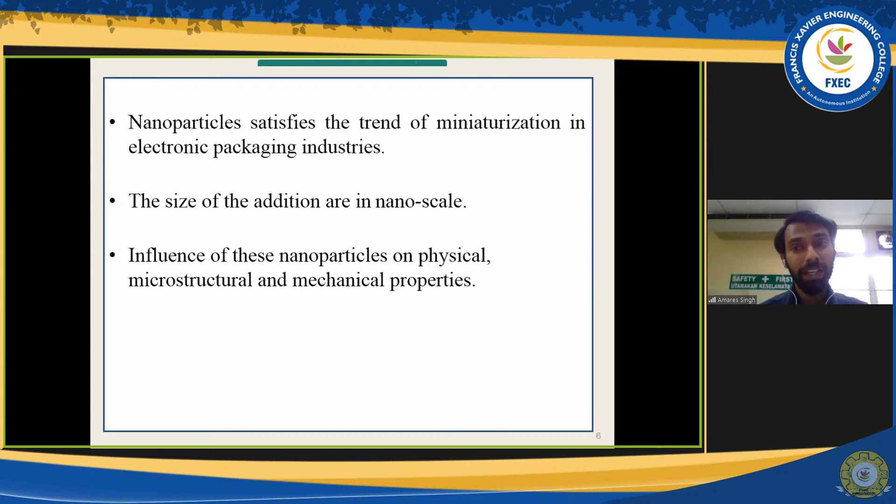So this background of study involves nanoparticle additions because nanoparticles are small in scale and they also satisfy the trend towards miniaturization. As we can see, our gadgets, mobile phones, televisions, laptops are not growing big in size, but actually reducing in size. But then how could it hold up in terms of long-term usage? We know our mobile phone has packaging chips inside that have to be held by a certain medium, which is the solder alloy. But looking at its size, it's getting smaller. So we need to do something to this particular solder alloy. It should be physically, microstructurally, and mechanically stable. So we will be looking into these particular studies.

So, problem statement. As you have seen, the title for today is lead free. Lead free means we are trying to avoid plumbum, because plumbum is categorized among the 10 most hazardous elements. So we need to avoid or reduce the usage of it. But the most used solder currently is basically the plumbum solder. Plumbum is mixed with tin and they produce the lead solder, which is tin-plumbum.

It is known to have very good mechanical properties. It also has a low melting temperature, only about 183 degrees Celsius, which means during the soldering process it would not damage other components, for example the LEDs or transistors. So being this proficient, replacing this solder is quite a challenge, because not many industries would want to accept a new solder that is probably expensive and at the same time not giving improvement.

At the same time, as I mentioned earlier, nowadays gadgets are getting smaller. So the solder I've looked into is the lead-free SnBi. I could say lead free because now tin is Sn here, and tin is mixed with bismuth, Bi, rather than plumbum. Of course, there are many other solders that have been studied, as I will be going through later in the literature review. In this current work that I'll talk about later, I'll be using lead-free SnBi solder. But it is said that it has mechanical strength which is not that good. That is why nanoparticles are being added.

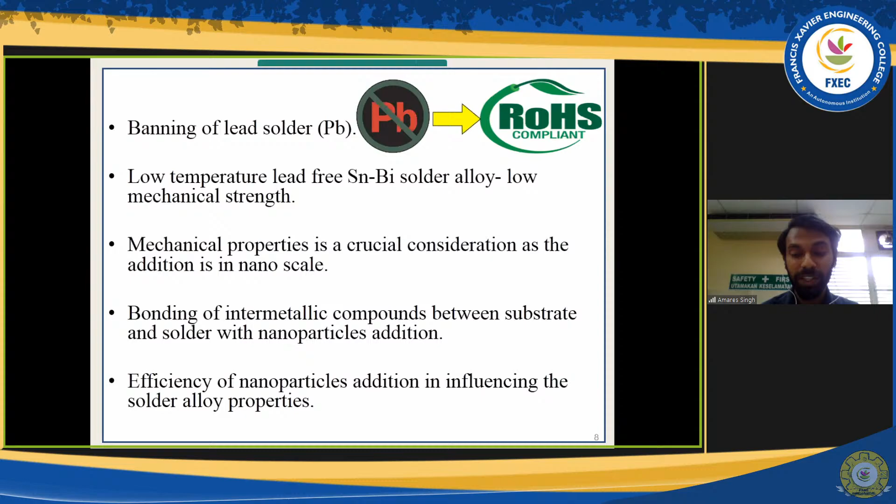In terms of mechanical properties, it's crucial that the nanoparticle addition satisfies high mechanical properties. We'll be looking into hardness and also shear strength. I'm aware that most of us know what hardness and shear strength of a material are. So when we are dealing with mechanical properties, we have to look into what is happening inside the solder when it's soldered on a substrate. Substrate means a platform, or in another case a printed circuit board, where the solder is melted and the components are attached. There would be a formation of a certain compound which we call intermetallic compounds between the solder and substrate. So as we can see here, the properties of the solder will influence the bonding between the solder and substrate.

So what we are trying to do here is to replace the traditional lead solder, SnPb, with a new lead-free solder. That is our main objective. As long as we can eliminate the plumbum from the Sn solder by addition of other materials, we are actually producing a lead-free solder alloy. But what should it do?

Okay, a lead-free solder alloy, when it's being soldered, should provide a metallurgical effect. That means when heat is applied to the solder, there would be a metallurgical joining, because we are using the solder. By this means, the chips are connected. Chips here means the electronic devices are connected through the soldering.

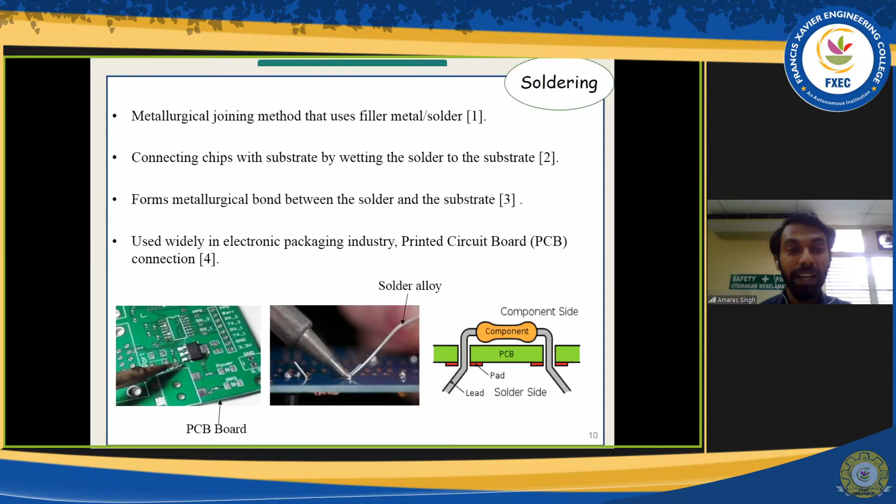So we know this is towards surface mount technology, because we are not altering the PCB board, but we are actually doing it on the PCB board. So it's actually a surface mounting technology. It should provide electrical, thermal and mechanical continuity. Thermal, of course, means it should be meltable, having melting properties, and mechanical continuity is in terms of shear strength and also hardness. As for the electrical, of course, it will be conductive because we are dealing with metal elements, right? So there's no problem in electrical as long as we are using a conductive element.

So I'll be looking into certain types of lead-free solder alloy. But before that, I've introduced slightly the lead solder, which is said to be the best candidate so far, but it's actually a lead solder. It has low melting properties, which is good because it does not damage other components. At the same time, it does not need any soldering adjustment. The temperature need not be adjusted because usually the soldering temperature is less than 250. Good mechanical properties. It's also low cost because it's very much available. Of course, it produces good interfacial bonding.

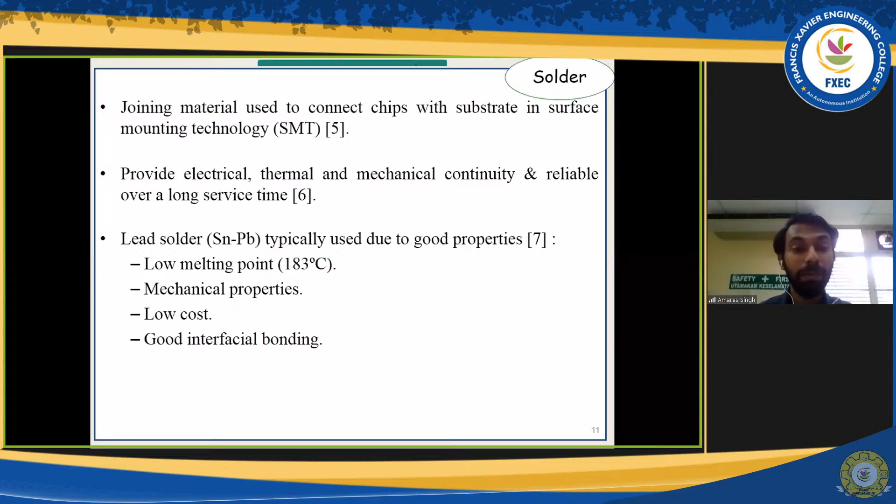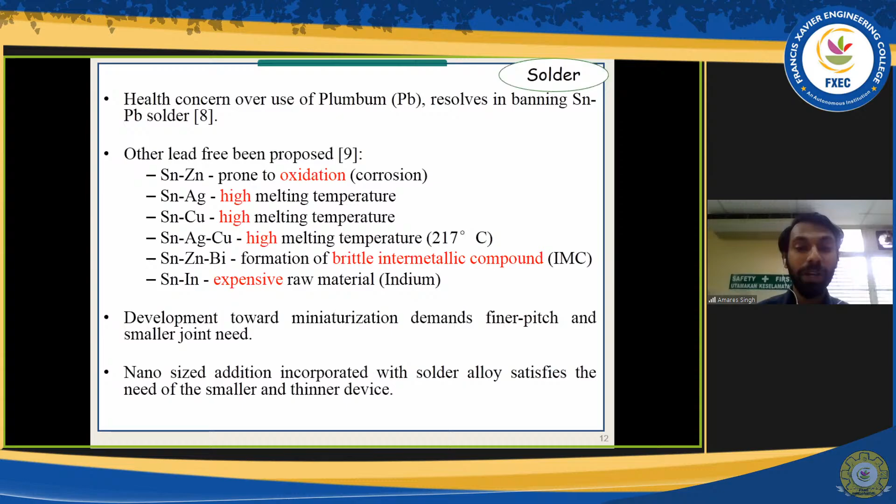At the same time, producing only lead-free solder has its limits. Let's say if we want to use a low melting temperature solder but need to increase the mechanical properties, we can't just add another element because we're actually reducing the size. So we are looking towards miniaturization, or addition of nanoparticles inside the solder alloy. There are a few methods that have been studied for nanoparticle addition. The first one is chemical reduction. That means they will be using a certain chemical component to reduce or break down the bulk solder to nanoparticles. But this is hazardous and it requires chemists to do this.

All right, we are actually engineers, so we try to use another method, which is the consumable direct current arc method. But this is a very advanced method that needs certain equipment which is quite expensive. Then we come to the conventional mechanical mixing method. I'll be explaining this method later. It's basically intentionally putting in or dispersing the nanoparticles into the solder alloy. Being called nanoparticles, the scale must be in nanometers, because even if the particles are at micro scale, the influence they impart to the solder alloy is different from when they are at nano scale. So it's very important to make sure the particles are at nano scale.

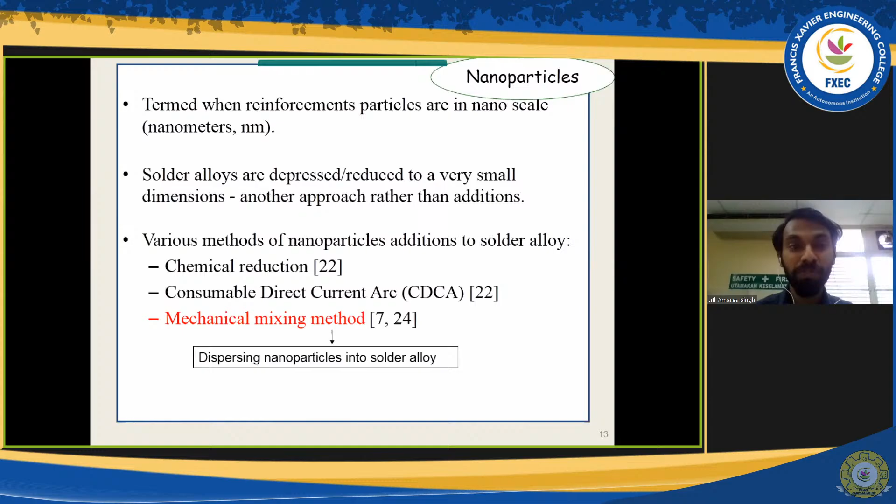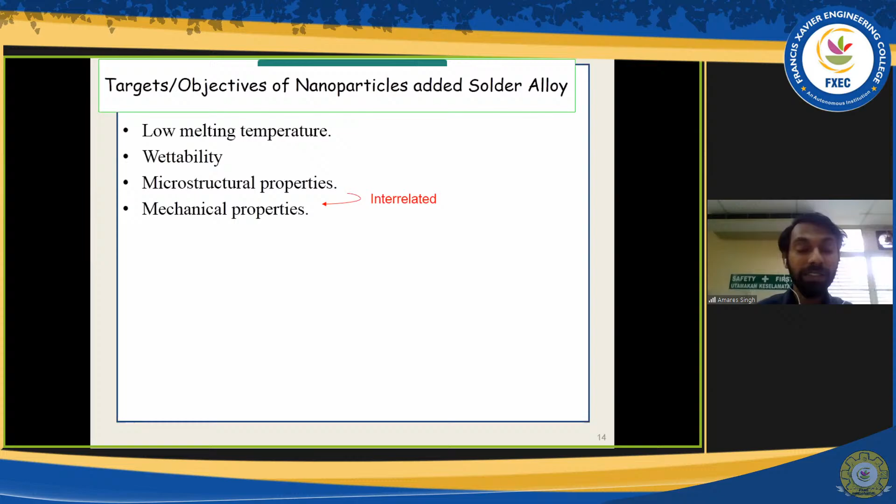Okay, hardness is the ability of the solder to resist deformation, because we know our mobile phone, for example, we might drop it, so it should have a good impact. All right, so hardness and shear strength are crucial mechanical properties. So these are a few studies that I've gathered.

If our soldering temperature is less than 250 degrees, it's okay. It's okay to use the nanoparticles because it's not elevating the melting temperature. At the same time, it would not cause any damage to the other components. So this is the important result that we see. But why is it happening?

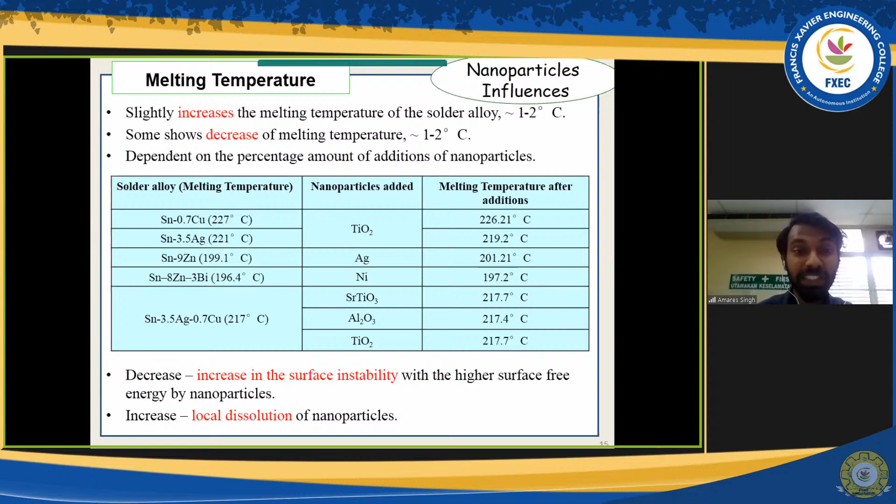So let's look at the decrease of the melting temperature first. Nanoparticles, when we add them, they actually increase the surface instability of the solder alloy. That means the solder alloy will lose its energy earlier than without the nanoparticle additions. Therefore, the decrease happens. Whereas the increase in the melting temperature is because of the local dissolution of the nanoparticles in the solder alloy. For example, when we are melting the solder and adding the nanoparticles, it will tend to have, of course, a higher melting temperature. So they actually produce local dissolutions, which slightly increases the melting temperature of the solder alloy. But not to worry, this gives us a good idea that addition of nanoparticles is not changing the melting temperature drastically. It's an important aspect to look into.

Another second part of properties is the wettability. We can separate the wettability into a few parameters that I've concluded here, the first being contact angle. In my work, I've also studied the spreading area and the spreading ratio. But before that, let's look at the contact angle. A lower contact angle, as you can see at the lower slide, means a good wetting, because a higher contact angle is a bad wetting, meaning that it can easily chip off from the printed circuit board. So let's see what happens when we add nanoparticles.

Here we could see that with small additions of nanoparticles, for example, if we add 5% of argentum, it tends to reduce the contact angle to 32 from 38. But then when we add 5% of zirconia, it seems to increase the contact angle further. So here the weight percentage actually plays a part, because when we add more nanoparticles, they have a certain character that they will attract to each other if there are a lot. So when they are trying to attract to each other, during the melting process, at the very edge of

the solder, at the edge of the solder is where the high energy is present. So these nanoparticles will be at the high energy area, and if the additions are a lot, they tend to agglomerate. What happens when they agglomerate, when they gather together, is that the solder will not be easily spread. There's like an impeding item or particles that will not allow the solder to spread properly. So here it's important to keep the weight percentage or the addition as low as we can, because even a small amount of nanoparticle additions can increase other properties such as mechanical. We don't need a lot. Whereas it's different when you're trying to add in a bulk element. If you add in a small amount of bulk element, it does not give any significant improvement.

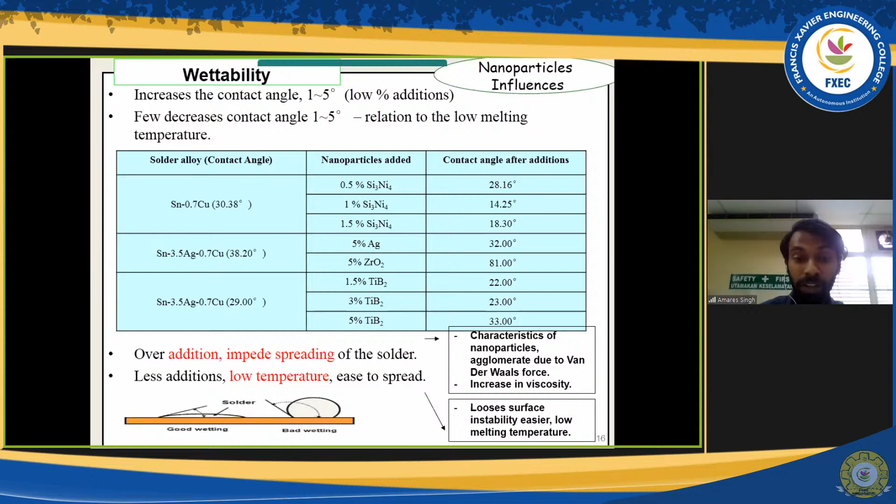So let's go to the next part. Microstructure is actually produced when there is a melting point and there is a diffusion between certain elements. So this is basically a metallurgical part. I would not want to go in depth because it involves more of material science. You have to look into the energy of a certain element. Let me just give a brief idea of what happens.

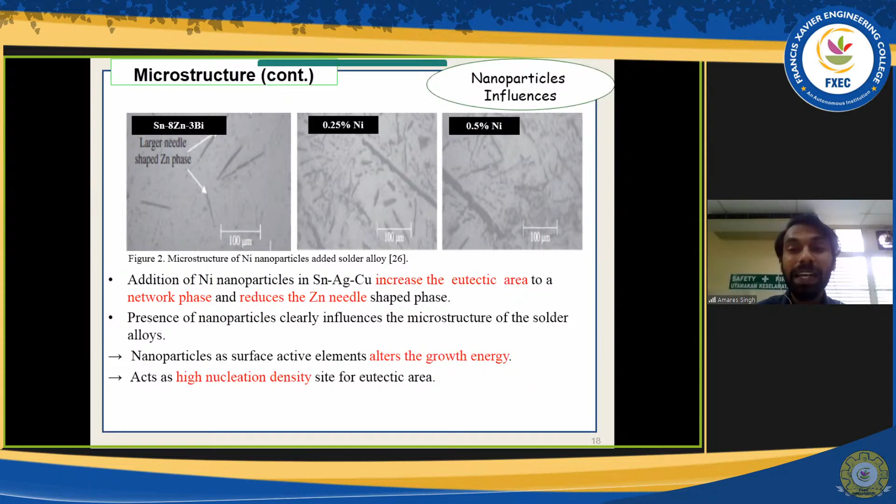So even in some cases, we can see that addition of nanoparticles actually tries to reduce the needle shaped zinc. So you can see the needle shaped zinc actually reduces upon addition of nickel nanoparticles, and they are a lot. So when they are a lot, they will try to be another source of strengthening effect.

Interfacial properties is actually the part between the solder and the substrate, between the solder and the printed circuit board. This is sort of like a layer that holds the component and also the printed circuit board. So we need a thin layer because thin layer will preserve a good bonding. But when you have a thick layer, the thick layer is prone to crack.

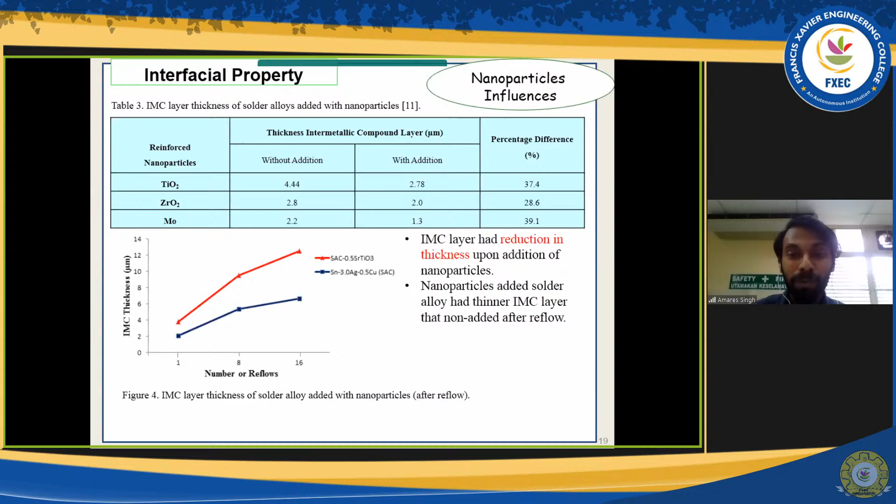So what happens when nanoparticles are added to these lead-free solder alloys? We could see, without and with addition, upon gathering certain literatures, the intermetallic compound layer thickness reduces quite drastically. Okay, I'll tell why. And therefore it preserves a thinner IMC layer. So let me just tell you what happens when the nanoparticles are actually at the interfacial layer.

So when these nanoparticles are there, they will block the diffusion process. That means, let's say there is a thing from the solder that tries to merge with the copper in the substrate. Yes, it can, but nanoparticles will actually reduce the diffusion process. Basically, it will not produce a high rate of diffusion and therefore preserves a thin IMC layer, intermetallic compound layer. But if there are no nanoparticles, there is free movement between the solder's element and the substrate. Therefore, at high temperature soldering or even at low temperature soldering, we will produce a higher or thicker intermetallic compound layer.

However, again, we need to preserve a small amount of nanoparticle additions. That means if you have a high weight percentage, like I said earlier, it will go to the edge of the solder. That means it is still considered as no effect in the center. That means the elements can still move freely without any blocking of the diffusion. So we have to maintain a small weight percentage of addition.

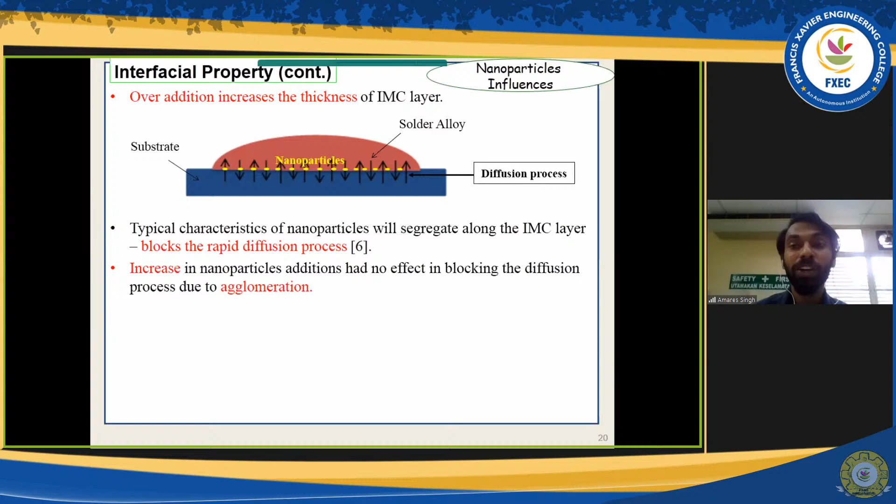So we can also see in terms of mechanical properties, additions of nanoparticles increase the hardness. But if you add a lot of weight percentage of nanoparticles, we will have a decrease in the hardness. This is because of the non-refinement process in terms of the microstructure.

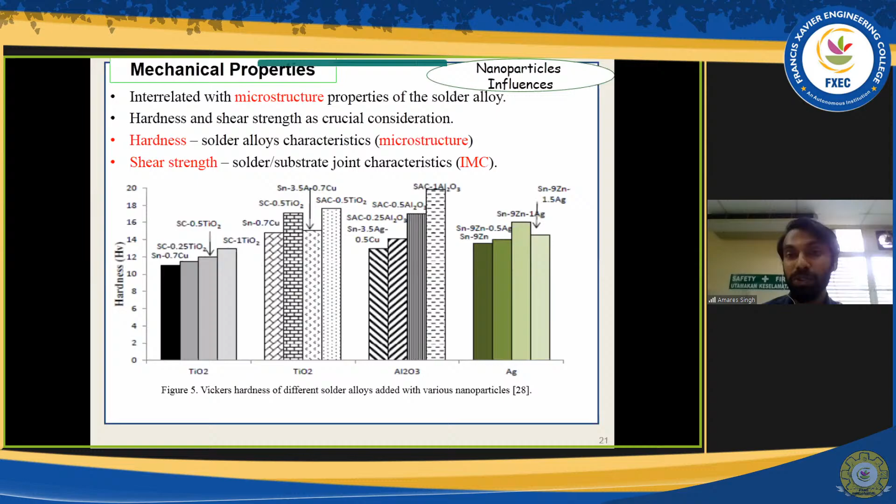Likewise, for the shear strength, we try to add more percentage of nanoparticles. If you have a small amount of weight percentage, it gives us better shear strength compared to a higher amount of weight percentage addition. This is again due to the agglomeration and also the non-refinement of the microstructure and of the thin IMC layer. So these are a few gathered mechanisms that are said to be the reason for the increase in the shear strength and also hardness.

We can see that one of them is grain size refinement, otherwise called Orowan strengthening. This is because the nanoparticles will reduce the grain size, and at the same time they act as another second phase strengthening mechanism.

Dispersion strengthening and the load bearing effect are also related to that particular concept. You can see I've highlighted what those three are related to. The fourth and fifth points, pinning of grain boundaries and obstruction of dislocation motion, are because the nanoparticles will be allocated along the grain boundary. So when stress is imposed, nanoparticles are hard materials. They cannot be penetrated. They have to be looped over, or they have to go around.

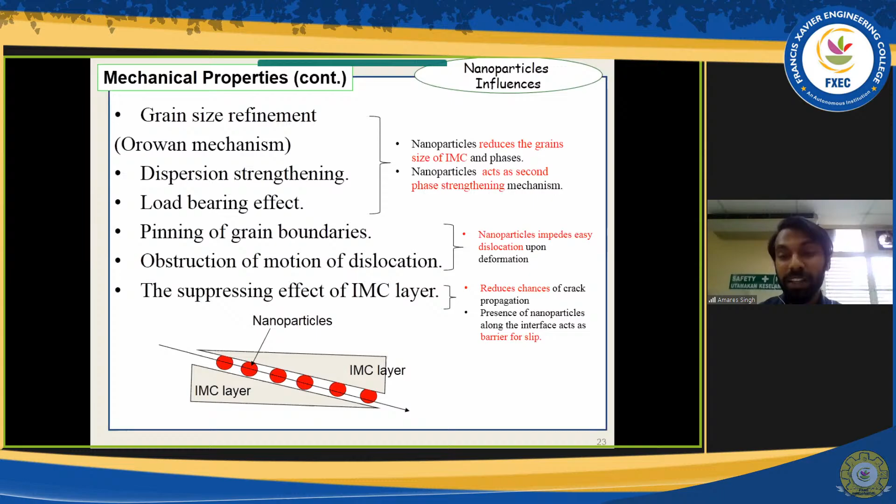So when more and more dislocations go around, there are piled up dislocations. So it's harder for the stress to penetrate. And the last one is the suppressing effect of the IMC layer, which is actually what I explained earlier. It will block the diffusion process between the elements in the solder and also the substrate. Therefore, we can get a thin IMC layer.

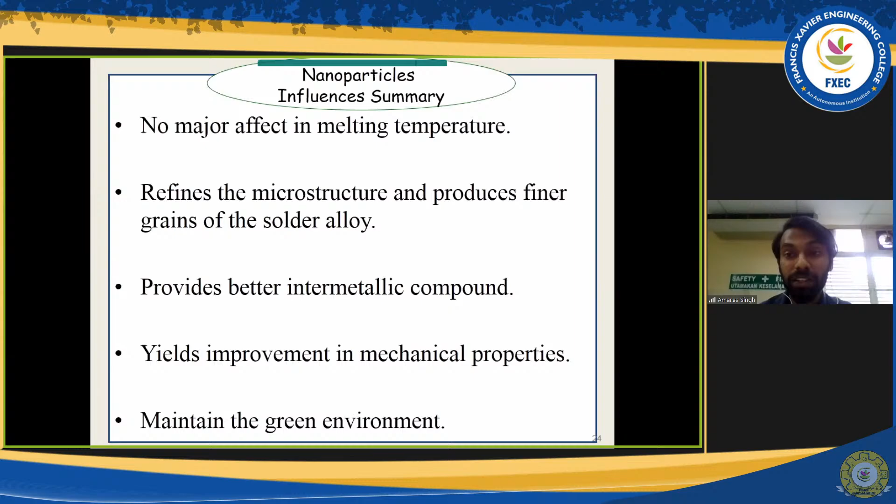So what does this whole literature review give us in terms of a hypothesis? No major effect on the melting temperature. The microstructure is said to be finer, producing a better intermetallic compound layer in terms of a thin IMC layer, and yielding improvement in mechanical properties. We saw the hardness and the shear strength increase. Of course, we are using a lead free solder, so it maintains its lead-free nature as long as we don't add lead nanoparticles, right? So it's a lead free solder alloy.

So what am I doing now? Of course, literature is just for us to study, and it gives us information. We need some experimental data, or we need some work to really show what the fact is, or what is happening in terms of the current trend. So basically, this is one part of my postgraduate or PhD results that I want to share here. Of course, this is confidential data, but I didn't put in the real confidential matters. I just want to explain what I've gathered. I've given graphs and so on, so no worries, it's just a sharing session.

Right, so this is basically what I've done. I've tried to add in molybdenum and zirconia. You can see Mo is molybdenum, ZrO2 is zirconia nanoparticles, and SnBi is, as I mentioned earlier, a low temperature solder alloy. Why do I want to choose a low temperature solder alloy? Of course, I don't want a higher temperature than SnPb, which is 183. There might be an argument from the industry saying that you are using a lead-free solder, but it's still a higher temperature than SnPb. So I've chosen SnBi.

But choosing SnBi gives me another problem, which is the mechanical properties. The mechanical properties of SnBi are not up to the standard or level of SnPb, simply because of the low melting temperature. With a low melting temperature, we know that the diffusion process is not as active or as vast as in a high melting point solder alloy. So the intermetallic layer is not that strong. That is why I try to add in molybdenum and zirconia.

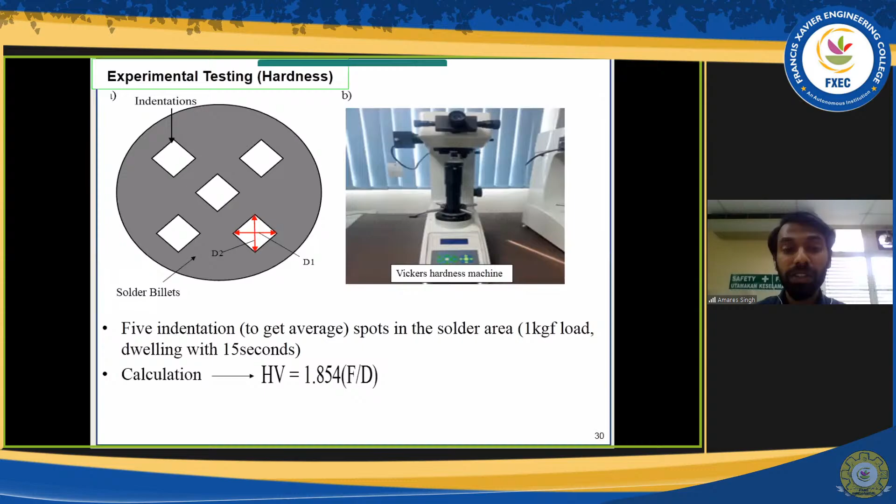So I can't be using the higher hardness machine. Vickers hardness is the recommended one. I've imposed a 1 kilogram force load for 15 seconds to get the hardness. As for the shear strength, I'm using the ASTM standard D1002. That is the standard for soft alloys, solder alloys, soft metals. Those are the standard testing methods.

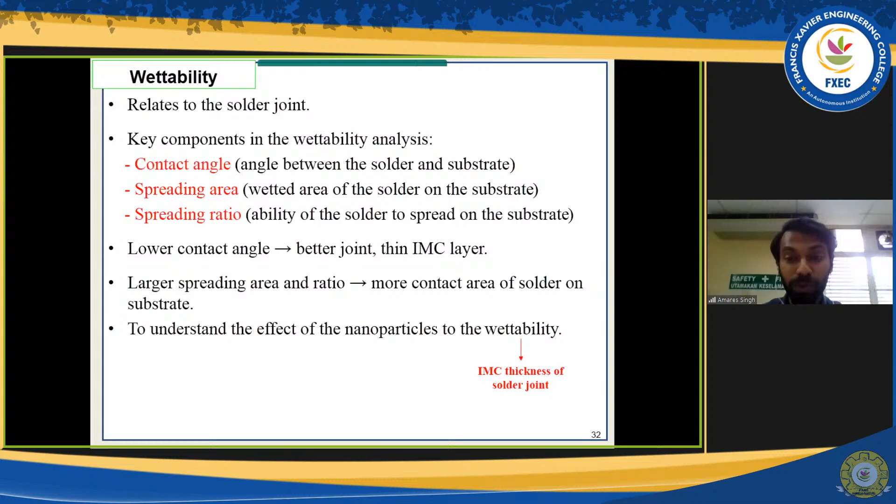So what happens when I test it in terms of wettability? A contact angle, as I mentioned earlier, is the angle between the solder and substrate. Spreading area is the wetted area, the area of the wetting or soldering that took place. So we are going towards a lower contact angle, larger spreading area and larger spreading ratio. Upon my additions of nanoparticles, I have gathered some data. We can see that upon additions of molybdenum, all 3% had lower contact angle than the non-added, with the lowest for the 3%. For zirconia, we also found that the lowest contact angle is for the 2%, whereas for all the others, it is still lower than the SnBi solder alloy.

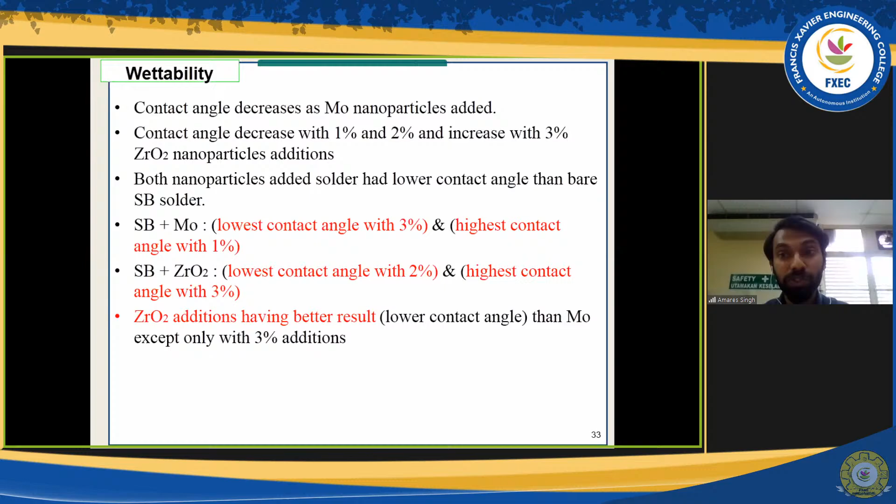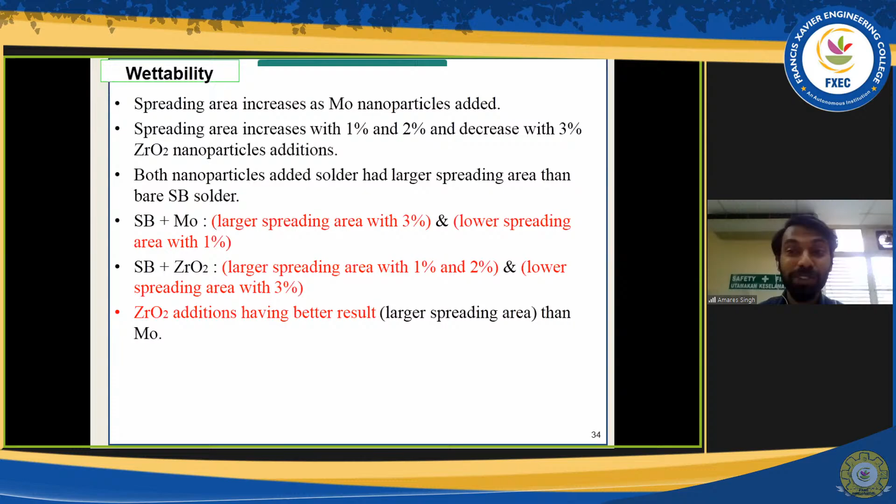So we can say that nanoparticles here have reduced the contact angle and also increased the spreading area. It's very important to note that the nanoparticles did not increase the contact angle. So we could say that our additions here are still acceptable, because if they produced a high contact angle, that would mean I still need to reduce the addition to less than 1%, maybe 0.5 or 0.3. But looking at it, 1, 2 and 3% are producing a lower contact angle. So we can proceed with the other testing as well. Again, the spreading area was larger in the nanoparticle-added solder for both molybdenum and zirconia. But in both cases, zirconia had a better result, probably because of the oxide element. I'll explain this later.

I have illustrated a model of my own. This is my own model showing what happens when we have the zirconia and molybdenum. In my particular study, the zirconia nanoparticles are much smaller compared to the molybdenum nanoparticles. Smaller nanoparticles have better segregation properties, so they are more evenly distributed, and a smaller contact angle is produced. Whereas the larger molybdenum particles tend to have van der Waals force that attracts the nanoparticles together. So the process of reducing the contact angle is not as efficient as with the zirconia. That is the reason for this.

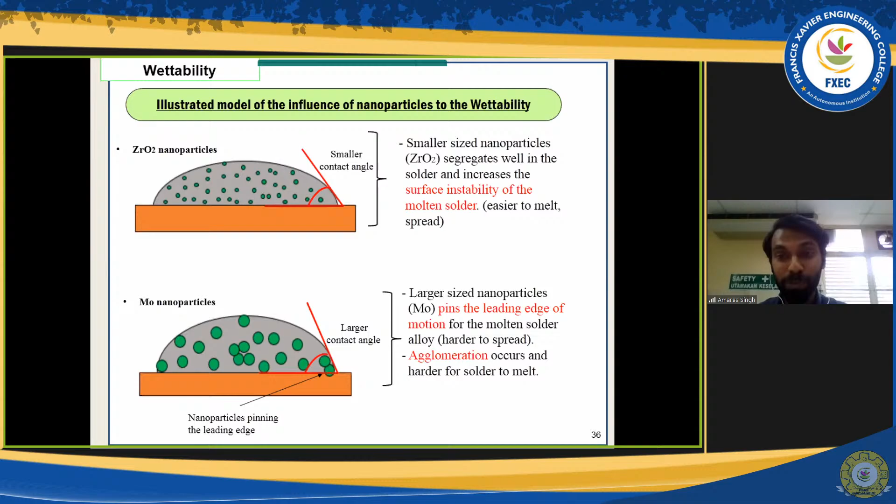I found out some agglomeration in the microstructural properties. Earlier I mentioned that the microstructural properties seem like a subjective area. How do we know if the grain is being reduced in size? Since our solder is tin and bismuth, I've taken the bismuth area, because from EDX analysis I can distinguish the difference between the tin and the bismuth area. So I've taken the bismuth area to be calculated.

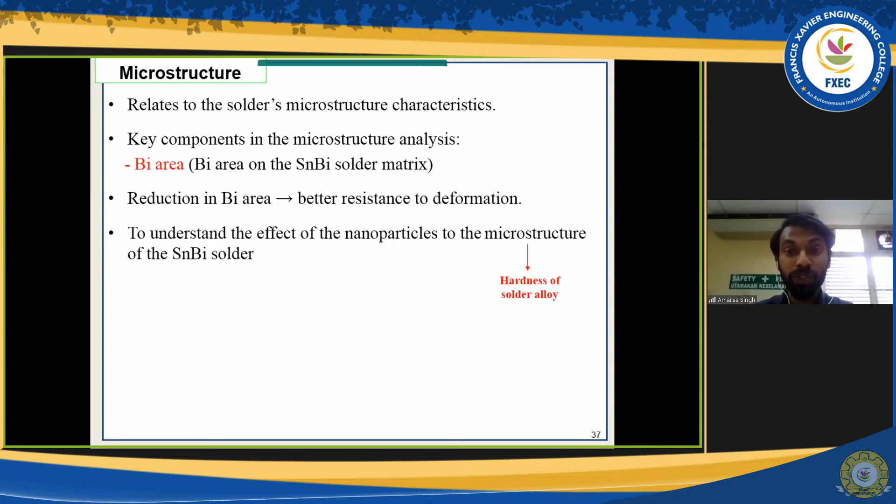If I can see a smaller area calculation for the bismuth, then I can relate it to the nanoparticle additions. So here I'll be measuring the area of the bismuth upon additions of nanoparticles. We have a software that can calculate the area for us. We have to, of course, separate the area of bismuth and tin, but after the separation is done by me, the software can give us the area of the bismuth. I have to do it a few times to get a proper average, and then we can say that this is a consistent result.

So we can see the first one is for the non-added. Then accordingly, I've listed the additions of nanoparticles in increasing percentage. Looking at the zirconia first, all 3% of additions gave us a measurement of the Bi area which is lower than the SnBi. Whereas for the molybdenum addition, only the 2% had a higher Bi area measurement compared to the SnBi. There is a reason behind this.

There's a reason behind this that is related to the shear strength or intermetallic compound. Because upon study of the microstructure, I have seen less molybdenum at the solder side. Most of the molybdenum for the 2% has attracted itself to the interfacial layer. When they are at the interfacial layer, they produce a thinner IMC layer, which was compatible in this study. From that, I could prove my hypothesis that the 2% molybdenum nanoparticles were not much found in the microstructure or solder side to reduce the Bi area, but were mostly found on the interfacial side, which reduces the IMC thickness.

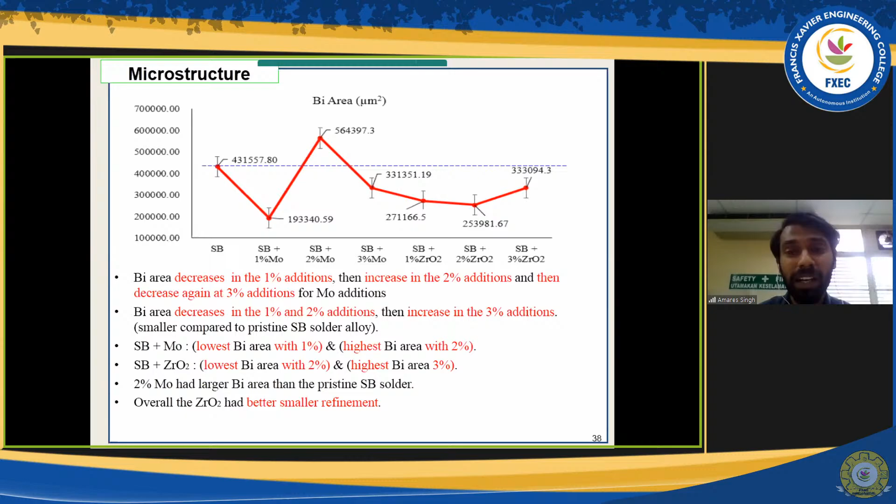However, although this gives a good impression on the IMC thickness layer, the hardness properties will not be as good as the shear strength. We need to be satisfied in terms of both shear strength and hardness. But we can see that the zirconia here had a lower Bi area. This is simply because of the small size of the zirconia nanoparticles. So this is again a model that I've developed.

We can see, in picture E, that this is not the SEM image itself. I've extracted and drawn this model from the SEM image, so I know what happened at the particular sites of the Bi and Sn. I've labeled here that the Sn is the dark area and the Bi is the white area. Upon addition of nanoparticles, the reduction, basically due to the zirconia and the 1% and 3% of molybdenum, is because these nanoparticles restrict the growth of the Bi. So they produce a smaller, refined Bi area. But for the 2% additions, there was agglomeration and not many molybdenum present, so there is no refinement process there.

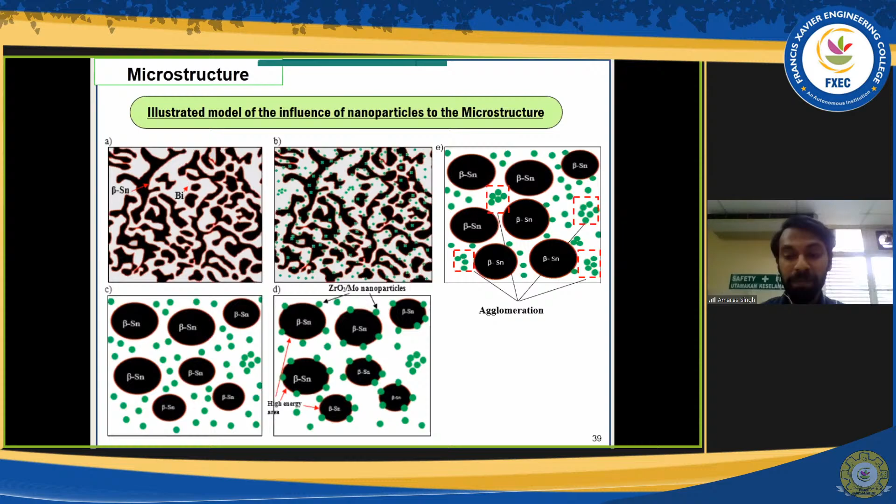This is what I have been explaining. When the nanoparticles are smaller in size, they are properly dispersed. But when they are larger in size, for example molybdenum, they should be given a lot of focus so that they are evenly distributed. Since we are manually distributing the nanoparticles, it's quite hard to have a proper distribution. So if you are using manual or mechanical stirring, you should use smaller nanoparticles. Unless we have an automated or injection sort of nanoparticle machine, then we can use larger particles. We can put the particles at a certain area to improve. Of course, it's cost.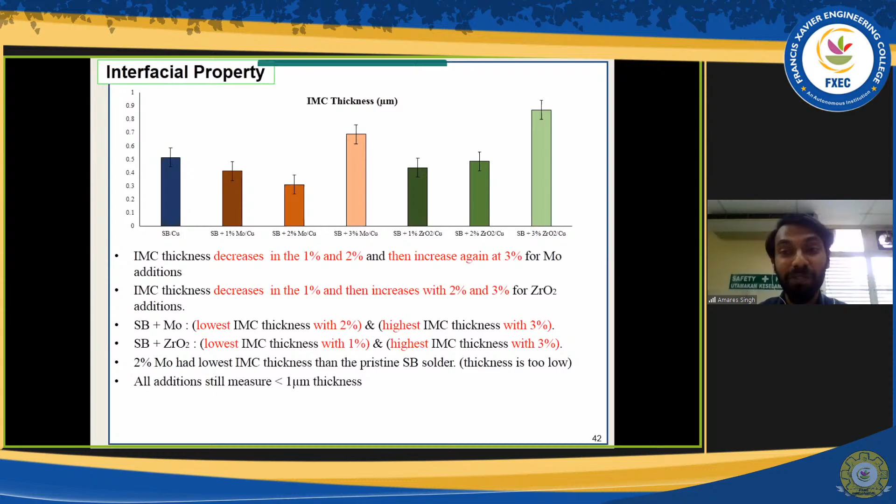So even though there is production of IMC layer, they are not as thick as what is being found in the 3% zirconia and 3% molybdenum. This is simply because 3% zirconia and 3% molybdenum have a high weight percentage. So the tendency for agglomeration to happen there is much more compared to the 1 and 2%. Even more so for the molybdenum, because molybdenum is a larger size particle. So looking at that, I saw the presence of agglomeration at the interfacial layer. Although there is a blocking of diffusion by the non-agglomerated particles, in some places that are agglomerated, the blocking of diffusion is lost.

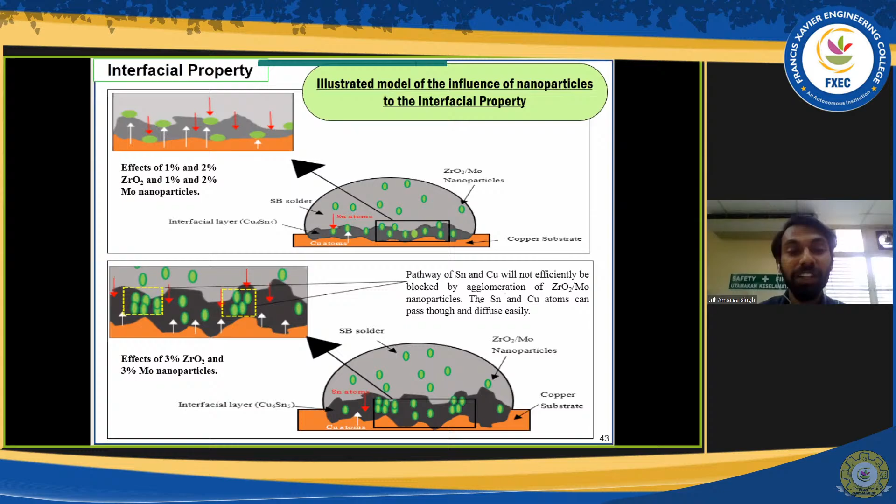So this is a brief summary. You can see that even though 3% zirconia and 3% molybdenum had a higher thickness, measured as a larger thickness, it is still less than 1 micrometer. So it maintained a thin IMC layer compared to the other studies.

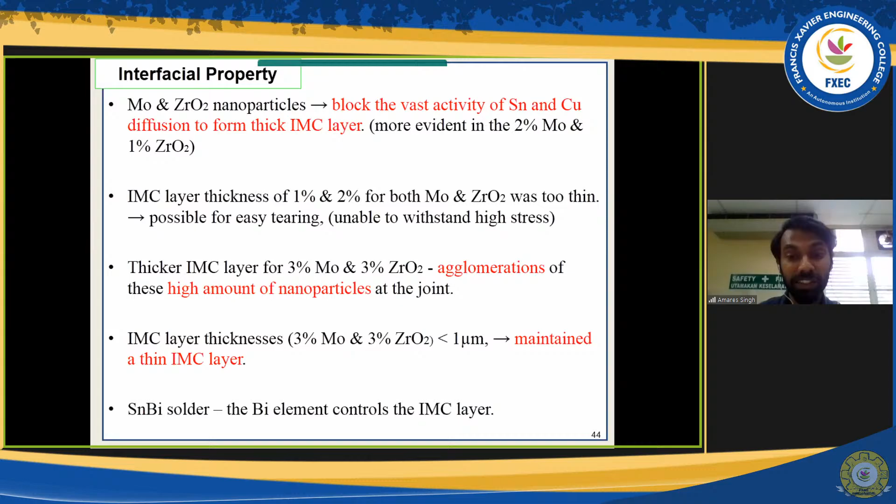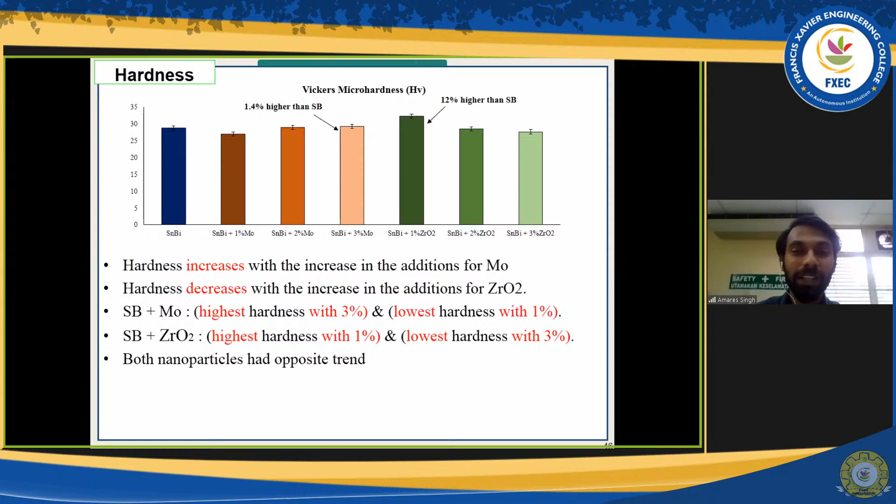Hardness, again, as mentioned, is one of the mechanical properties, the ability to resist deformation. So here we can see that additions of nanoparticles did not really increase the hardness, but even so there was an increase, the increase was small. But it's important to know that the decrease was not high either, because, looking at the microstructure, the nanoparticles are not much present there. They are present mostly at the interfacial layer, because as I said earlier, the interfacial layer is where the high energy is. So nanoparticles being active particles, they will of course go and allocate themselves at the interfacial layer. But some nanoparticles which did not go to the interfacial layer stay in the solder area only, on the solder side. So they act as a second phase dispersion strengthening mechanism that increases the hardness. It was quite obvious for the 1% zirconia and 3% molybdenum.

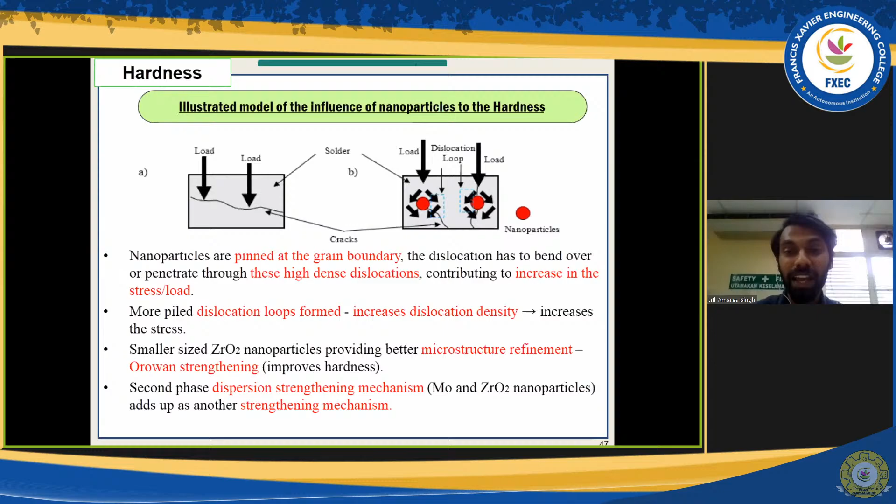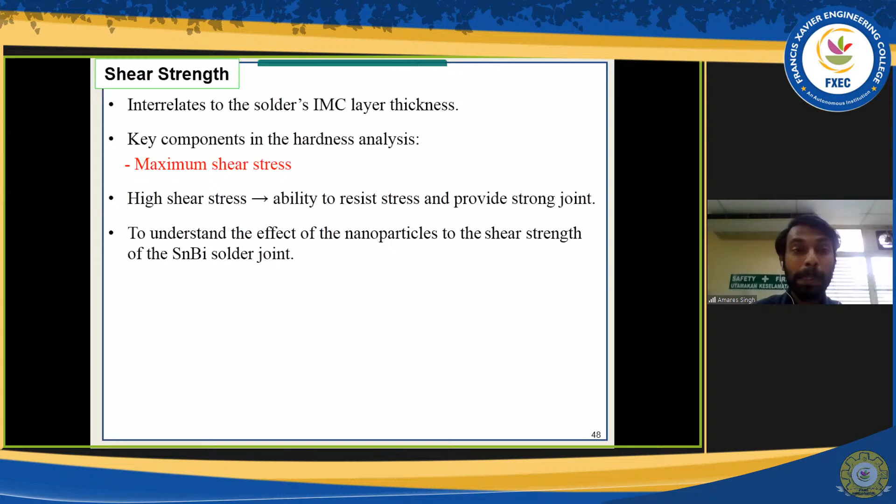But interestingly, when we look at the zirconia, in all three zirconia additions, even though there was zirconia that has been diffused or reacted with the tin or copper, there was still presence of nanoparticles of zirconia itself.

So it actually gives another strengthening effect to the shear strength. So this has to be tallied with the thickness as well. So we could say here that the higher percentage of shear strength was observed for the 3% of zirconia. So this is actually very high, or quite to say more than half of the SnBi.

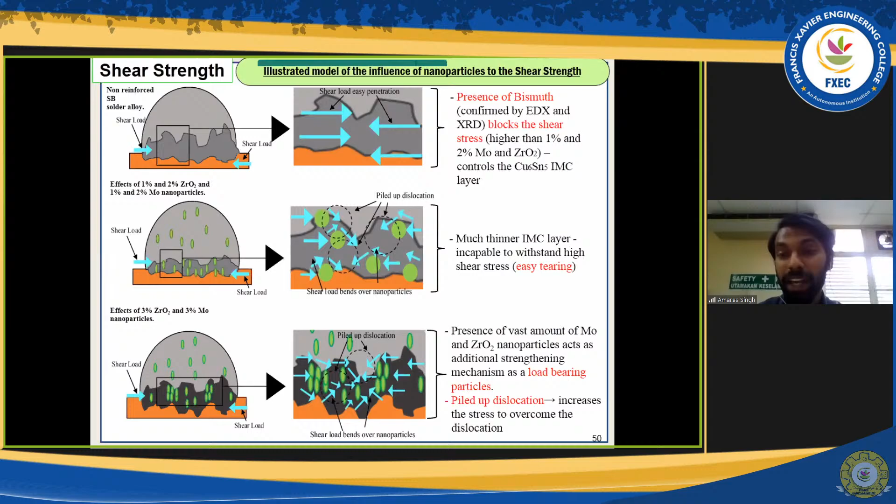of the IMC layer. But then we have smaller size nanoparticles, especially for zirconia, and also observed for the 3% molybdenum, even though there was agglomeration of the 3% molybdenum, but they actually present at the IMC layer. So when the shearing is done, they act as another blocking or restriction particles. So that is why, after I got the scanning electron microscope and XRD results, I came up with this model. So it could say that the zirconia 3% and the molybdenum 3% had the highest strength.

So this is the explanation. Basically whatever I've shown here is written in this slide. So maybe perhaps I'll just summarize. So when you have lesser than 1 micrometer IMC layer, it's still capable to withstand high shear stress. But then looking at the 2% molybdenum, it has a very low shear strength because although it is less than 1 micrometer, it's very, very thin. So perhaps it did not help in terms of shearing resistance.

At the same time, a proof of hypothesis was there was no presence of molybdenum solid nanoparticles. As discrete particles, they were not there. They were actually in terms of a compound. But in zirconia, even though it reacts with the tin and also copper, there was presence of solid or discrete zirconia. That is why we can see the shear strength of the zirconia in all 3% of addition was way, way higher than the molybdenum additions.

Okay, just to give another input, I didn't include it in this slide, but I've done a weighted objective method. So people, or maybe you guys, will be having so much information, but I don't know what to choose. I had 1-3% of molybdenum, I had 1-3% of zirconia. How could I say this particular percentage and this particular nanoparticle is the best? I've done the weighted objective method.

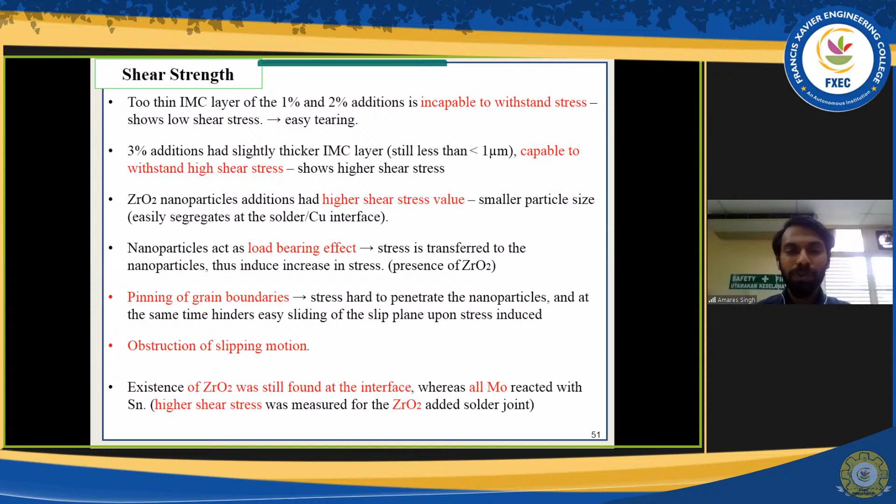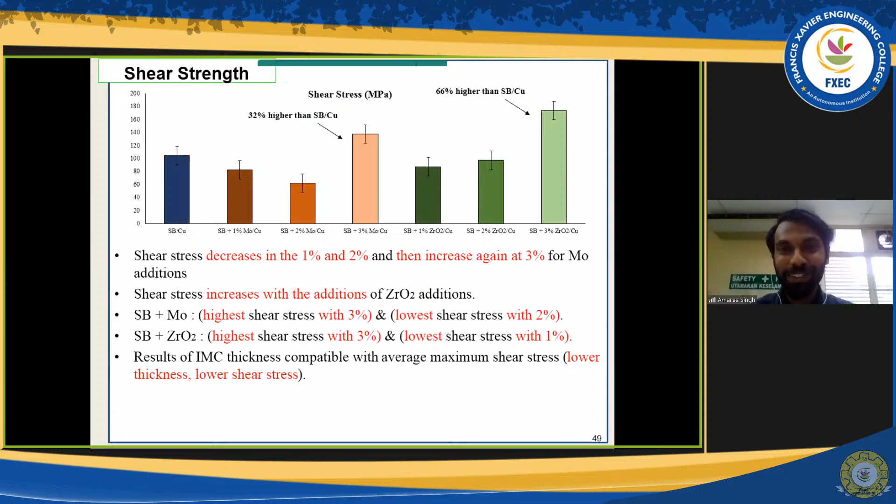Sir, I would like to read out one question to you. What is the maximum shear strength of using solder material? All right. So can I show my slides? Yes, of course. This is my work, so I can't show the results, but I got 66% higher. So let me go to the literature review. Maybe we can see a few studies that have come up with a certain shear strength measurement.

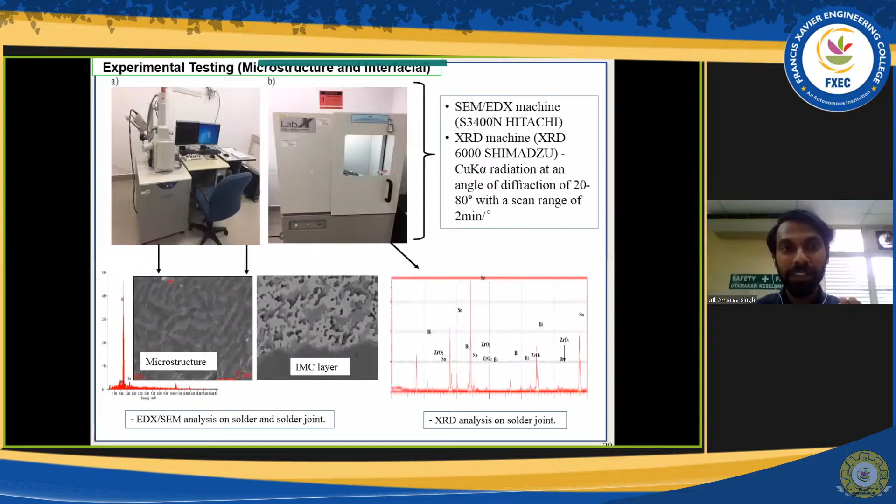Okay, so let's look at this. This is in terms of megapascal. The highest that we have seen here is 24.86, but we can't have a standard shear strength because it varies in terms of melting temperature, in terms of the additions of nanoparticles and so on. So to answer that, we need to compare with the non-added solder alloy itself. For example, here the non-added solder alloy is SnCu, 15.1 megapascal. So this researcher has added silver and come up with 24.86 as the highest. So what he or she will do is compare with other researchers who have worked with the same SnCu. So that's how we can gauge our shear strength.

So even if I have done SnBi, I have to see another researcher who has done SnBi also, and see what the shear strength is. So that's how we can come up with this particular data, or we could say a result. I hope that answers the question.

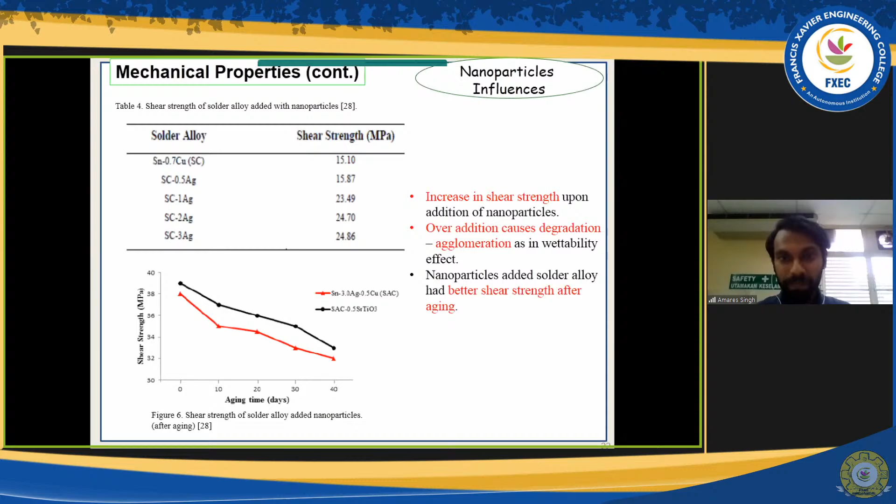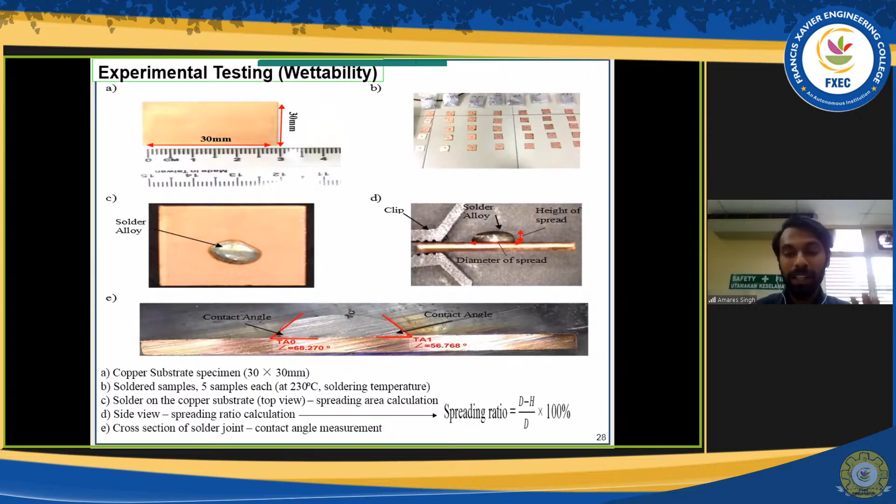Thank you, sir. There's another question posted here. What about the processing speed of this one? Yes, sir. This is a good question. If you ask me, we must use a standard procedure so that we are following what is happening in the real world. So ASTM D1002 has provided us the speed. The speed here, I can assure you, is mentioned as 1.3 millimeter per minute. I didn't come up with this figure. This is according to the ASTM standard. Different standards have different speeds for different materials. Since we are dealing with solder alloys, soft materials, and in accordance with this ASTM, we must be using 1.3.

Thank you, sir. On behalf of the participants, thank you for giving a clear answer with PPT reference. Thank you. There are no more questions to be read out, sir. So I think we can move on to the vote of thanks session.